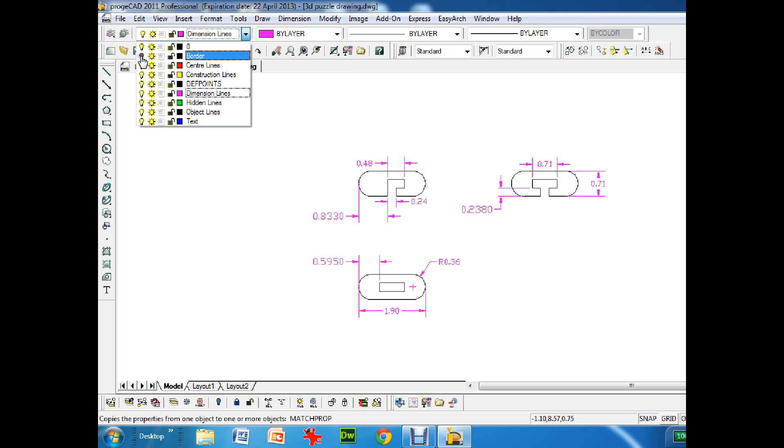This is a tutorial on how to take the 3D puzzle that you've drawn and convert it into a laser engravable file. So to start off with, if you've done all your files right and your borders and things, I should be able to come up to the turn layers on/off dialog box here, and if I turn off the border, it will disappear. And if I also want to turn off the dimensions, I can click on the light and the dimensions will turn off, and I'm left with just the drawing. So that's my object that I want to convert and put onto the laser engraver now.

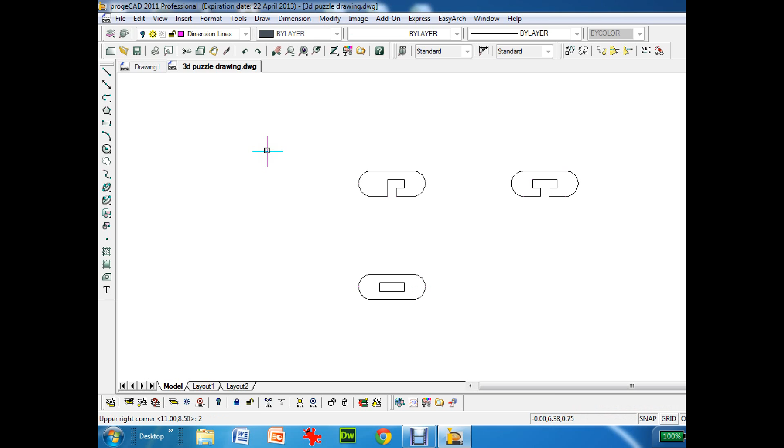Now the next step is to actually change the limits to match the laser engraver. The laser engraver bed is 24 by 12, so I'm just going to type in limits and hit enter. And then the lower left limits will be 0,0. The upper right corner now will be 24 by 12. Okay, and now it's changed. You see nothing on the screen.

Now what I'm going to do is turn my grid on, and I'm going to right mouse click on the grid and go settings. And down here, I've got display dotted grid in 2D model space. I want that checked. And display grid beyond limits, I want to uncheck that, because that way it gives me just the laser engraver bed.

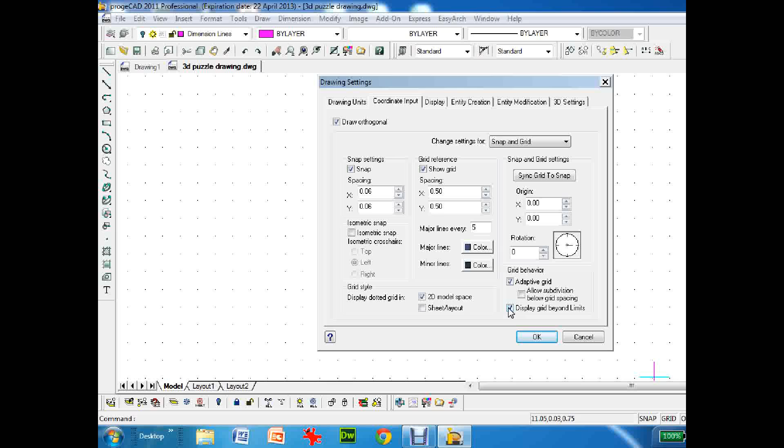So I hit OK. Okay, so now when I actually zoom out, on my screen I've got to zoom, A for all. Okay, there's my bed. You can see the dots kind of end there and the dots end there. So there's the actual bed of my laser engraver now.

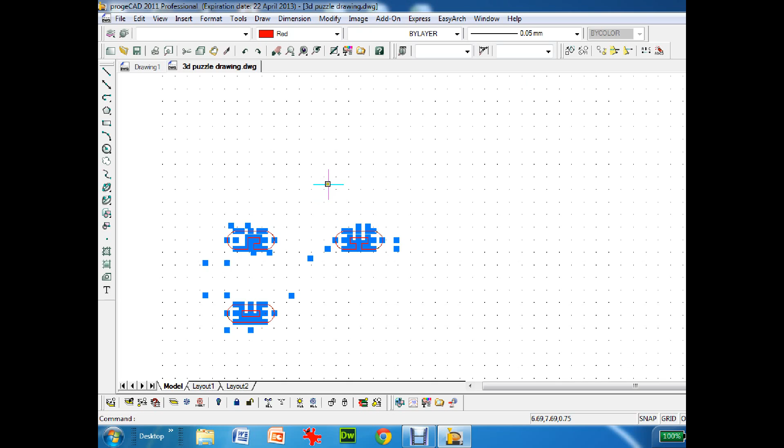Now what I need to do is convert the lines to a color that the laser engraver sees. So I'm going to highlight the entire drawing, or all the objects. Up top here, under color control, I'm going to switch it to red. And finally over here, line weight, I'm going to change that to 0.05 millimeters. Okay, and I'll just hit escape. And there's now my colors. So now the laser engraver should be able to see the color red, which is a cutting color.

Now the last thing I need to do is move all the objects up to the corner, because this is the actual bed and I want the plastic that I'm going to cut to be in the upper left corner. So I'm just going to highlight each one, M for move, click on it, and you can see I can only go straight that way, so I have ortho on. So I'm just going to come down here, click ortho. Now I can move it to where I want, so I'm going to put it somewhere up in there.

And I'll highlight the next one, M for move, select somewhere, drag up close, and again, M for move, oops, excuse me, zoom, A for all, I'll highlight it, M for move, and like this. Okay, so now I have my objects close together up in the upper left corner.

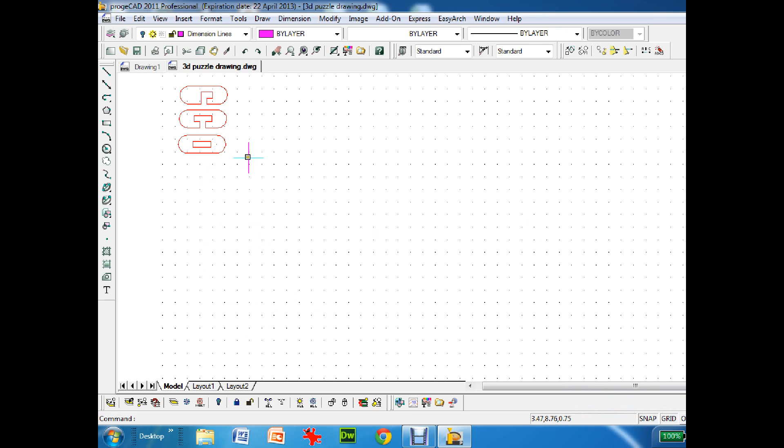Okay, now the next thing I want to do is plot it or print it. So I go File, Plot Preview, and you'll see right now it's defaulted probably to an 8.5 by 11 piece of paper. It kind of looks funny. So I go Print Settings. And on the printer settings dialog box, under device, I want to change the printer to the VLS 3.50, which is also known as the laser engraver. On mine I call it this, but on the computer where you actually print, this is called laser engraver. You'll notice that the bed changes to 24 by 12, the paper size, and landscape.

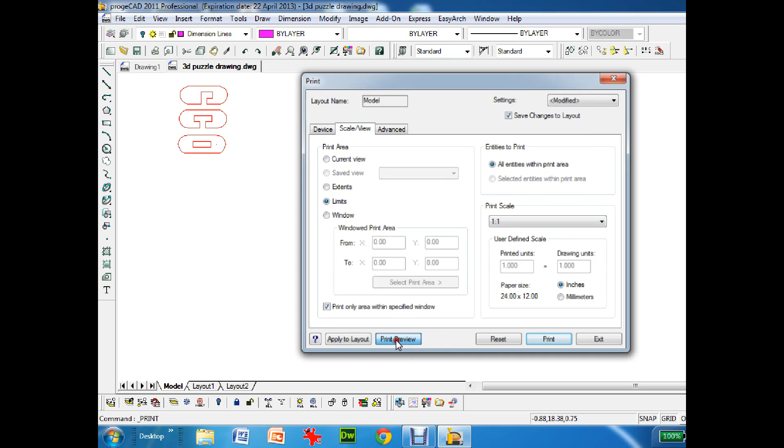And then the next thing I need to do is under scale, I want to print it to the limits, because I want the whole 24 by 12. And the last thing is here under print scale. This is very important. You need to make sure that it's scaled 1:1. So exactly what I've drawn is going to be cut out in real life at 1:1 size. Now if I hit print preview, you'll see that there it is on the screen. Okay, so I'm ready to go.

Unfortunately, because of the version of this program, this black stuff at the top will always be there. What we'll do later on is actually get rid of it using the laser engraver. Okay, so I just hit print and it prints off. You don't see anything go. Okay, and I'm going to stop right there and end the demo, and I'll pick up on how to actually use the laser engraver.